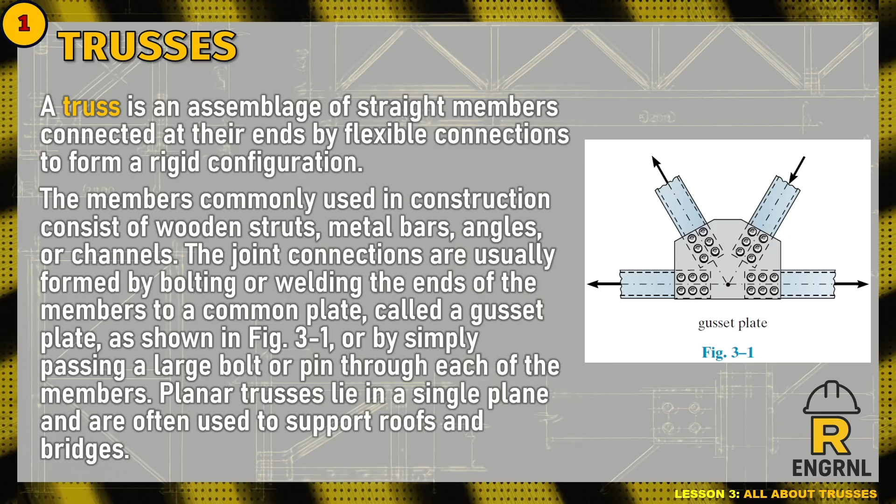But in further discussion, we will also explain if theoretically we can address these connections. So a sample we can see is roof trusses, maybe industrial or sometimes residential.

Trusses used to support roofs are selected on the basis of the span, the slope, and the roof material. Some of the more common types of trusses used are shown in figure 3-3.

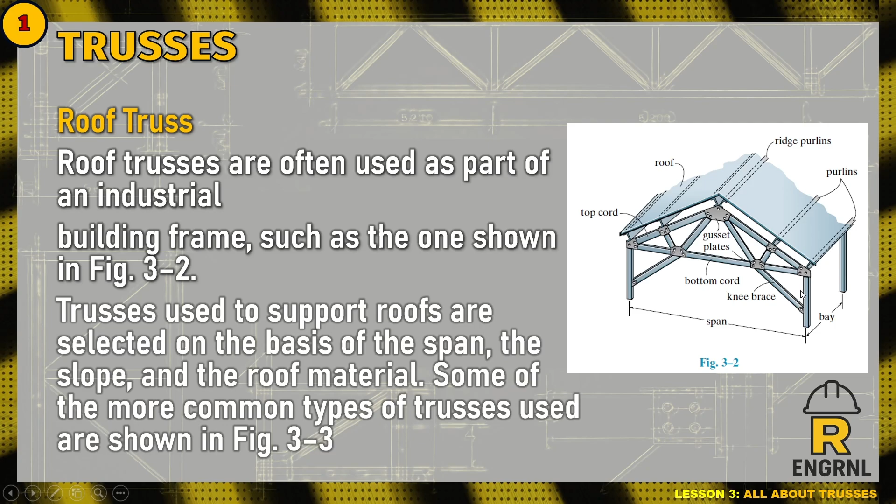But let's first see the common parts of the truss. So it has a top chord, which is the sloping part, literally called top chord because it's at the top. And the bottom chord is what we call the part at the bottom.

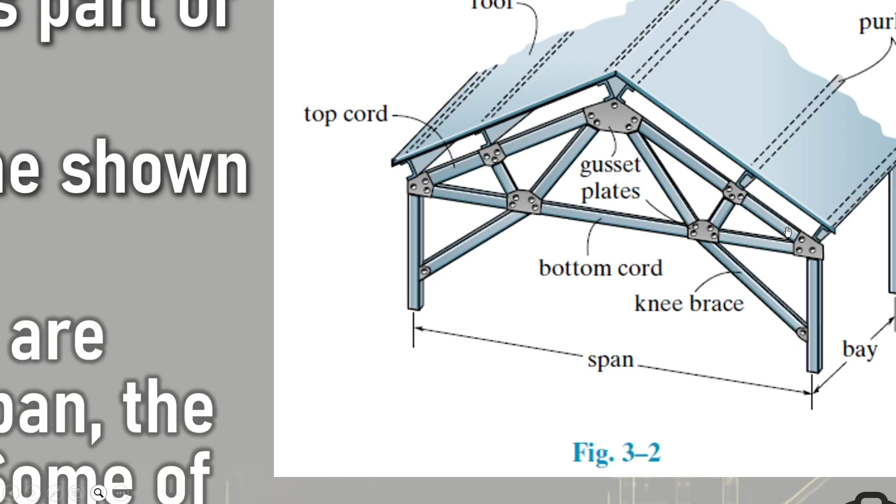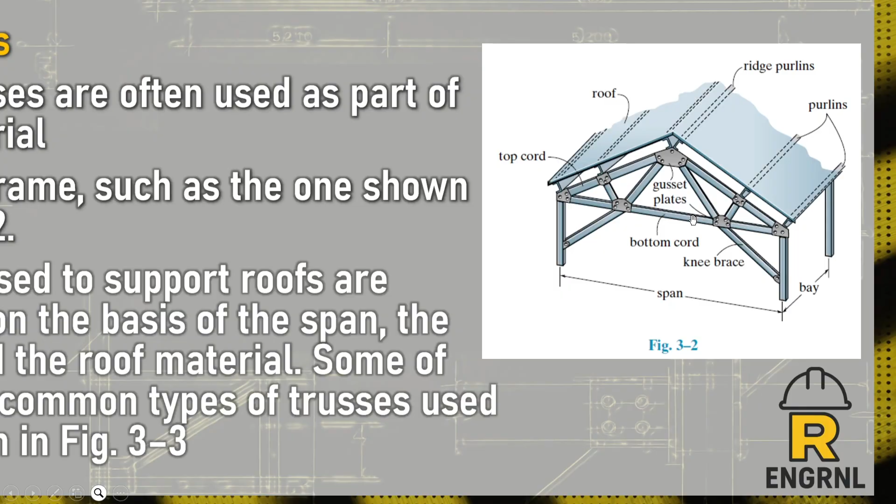We also have web members, usually diagonal and vertical. And if you notice in trusses like this one, this is the Howe truss, which is a common truss. This is what we call the king post.

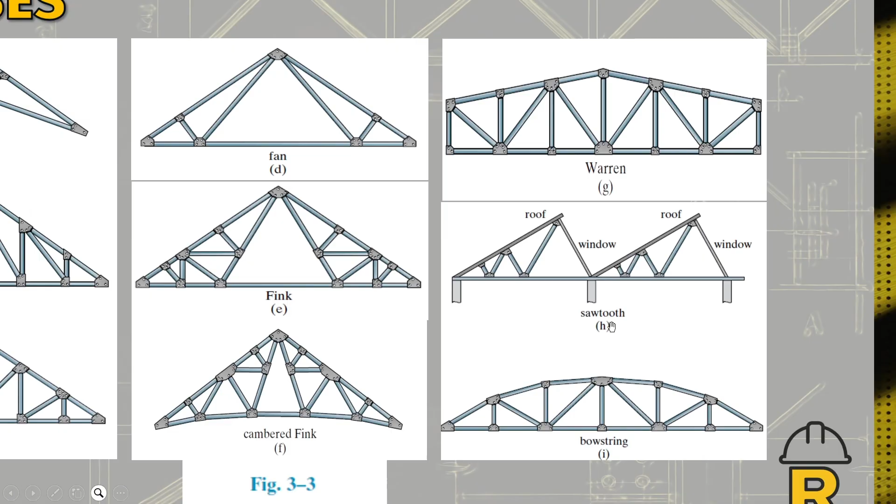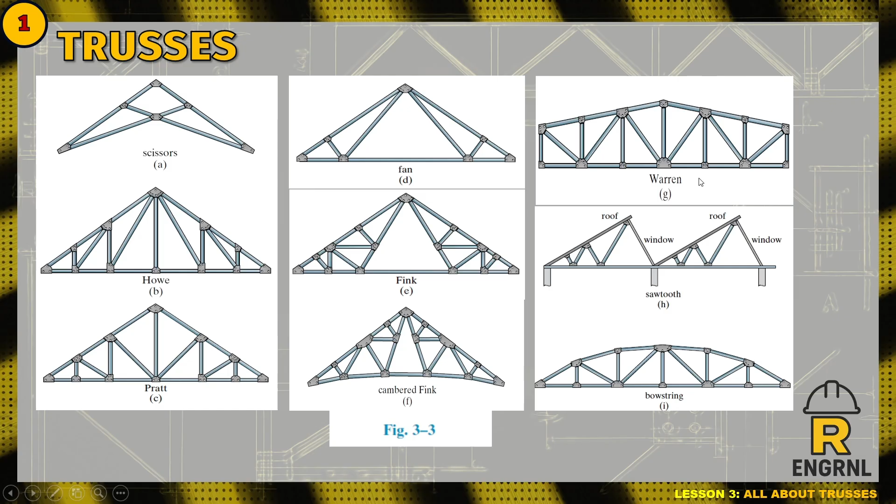The main structural elements of a typical bridge truss are shown in this figure. Here you can see the use of the truss on both sides. It's not just to guide passersby as railing, but it's really the main component to resist loads, whether moving loads, dead loads, or live loads on the bridge.

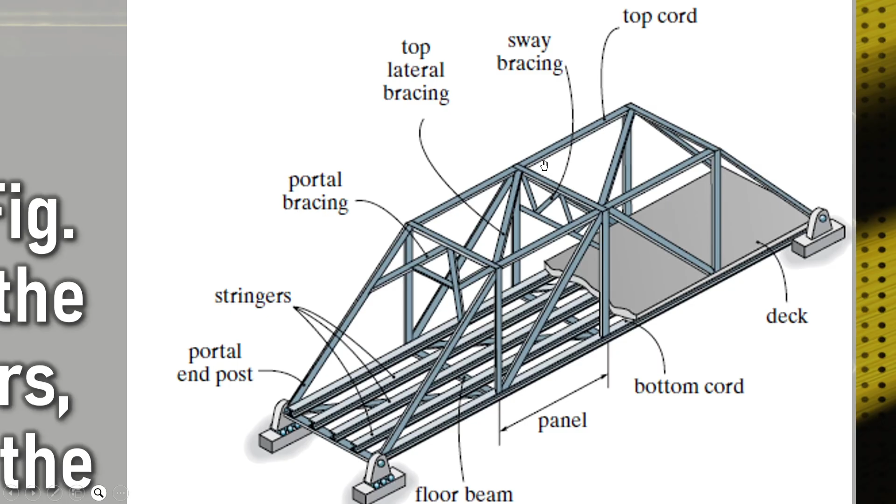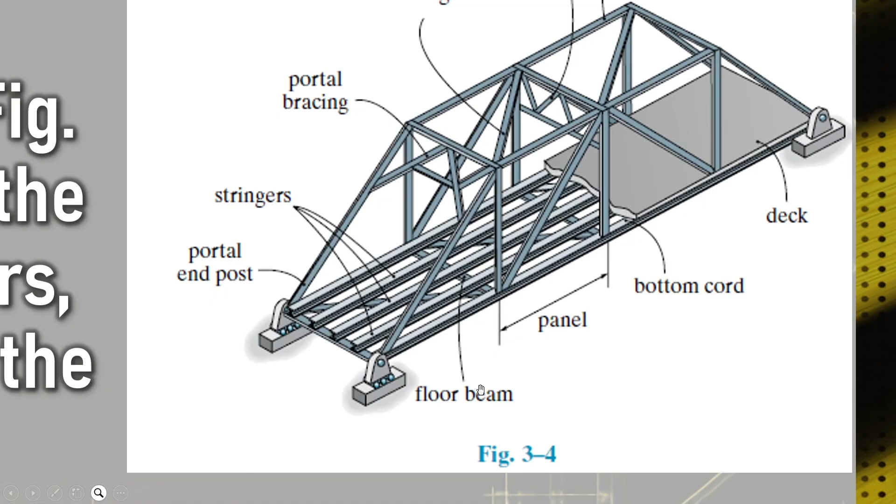So it's supported by different bracings. We have top lateral bracing, and sway bracing to resist lateral loading. We also have portal bracing, stringers, portal end posts, floor beams, and the deck.

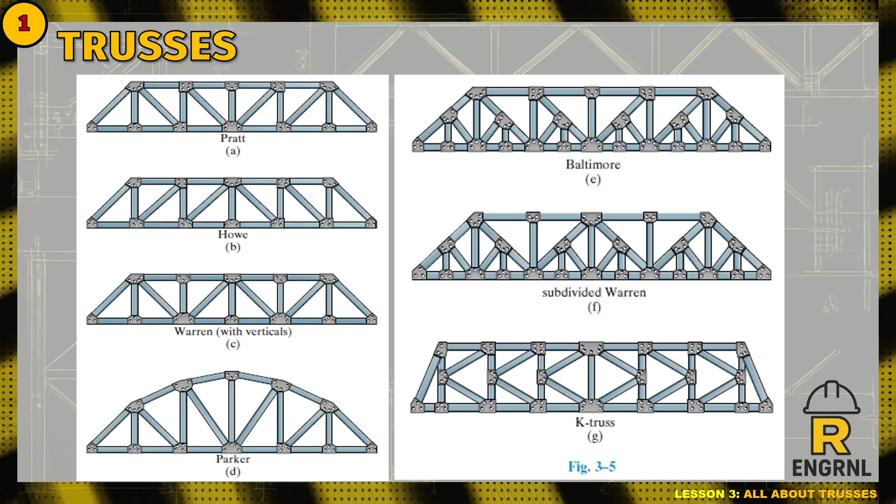So we have assumptions for the design of our trusses. A very good explanation from our reference: to design both the members and the connections of the truss, it is first necessary to determine the force developed in each member when the truss is subjected to a given loading. In this regard, three important assumptions will be made in order to idealize the truss.

This is the idealization of a frame, truss, or beam, which we taught in our last class, so we can better see the nature of the load and its positioning. So, number one, we should assume that all the connections are joined together with smooth pins, even though in actual position it is welded or bolted.

We assume this as a smooth pin, which should be frictionless. It's a ball and socket joint in space trusses, and a frictionless pin in plane trusses. All loadings are applied at the joints. Another important assumption is that we neglect the weights of the members, since the force supported by the members is large in comparison with their weight.

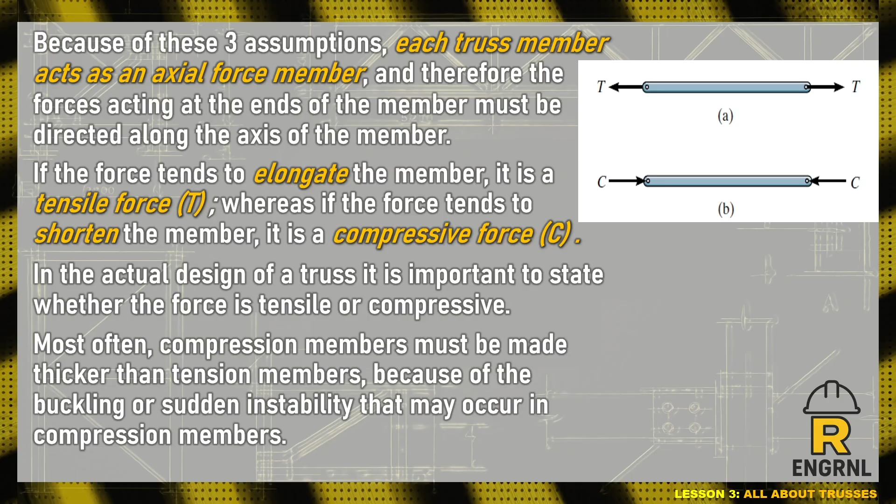We also have an arrangement of members in plane trusses. We can define a plane truss as internally stable if the number and arrangement, take note, not only the number but the geometric arrangement of its members, is such that the truss does not change its shape and remains rigid when detached from the support.

Same as in our first topic on beams and frames or interconnected members, we see stability when it remains rigid even if you remove the support. The term internal is used here to refer to the number and arrangement of members contained within the truss. Instability due to insufficient external support or improper arrangement is for the external support.

So that means we also need to know about internal stability. We have formulas, we also have a guide on how to determine if this is stable or unstable.

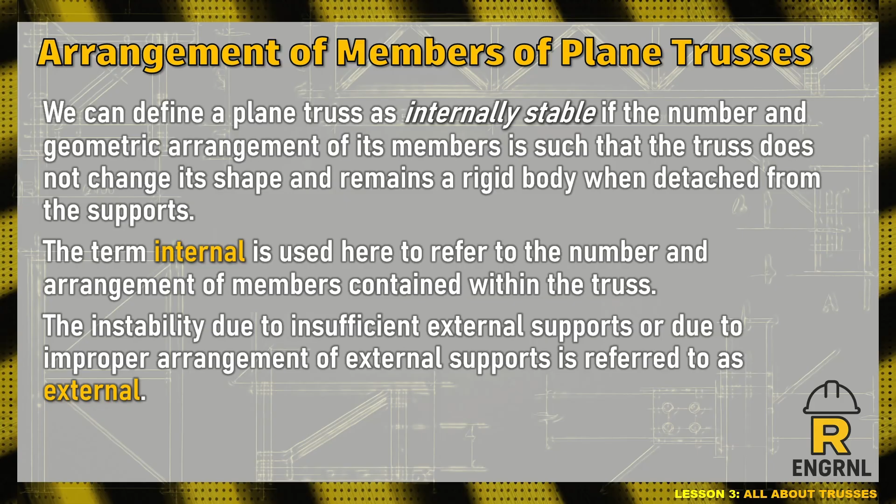There's also an arrangement that causes internal stability, and one of those is the basic arrangement of a simple truss. I'm sure you already know this - of course, a triangle, as shown in letter A.

So the three-member basic simple truss is a strong one that will resist each other when we apply an external load. We've proven that already.

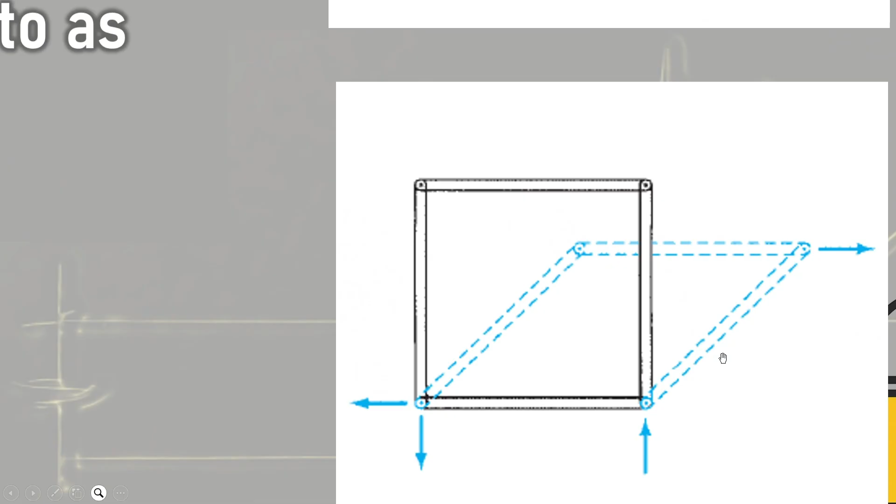So the term internal is used here to refer to the number and arrangement - that's what we were saying earlier.

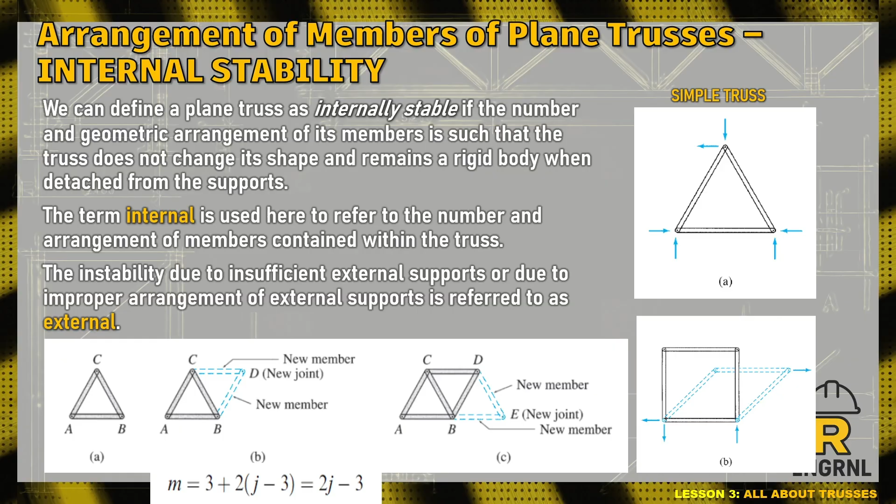We also have a basic counting method - if we keep adding new members to the truss, we can build a series of simple trusses. Take note, this is the type of truss that we can immediately define, meaning it can be covered by our formula to define if it is internally stable or unstable.

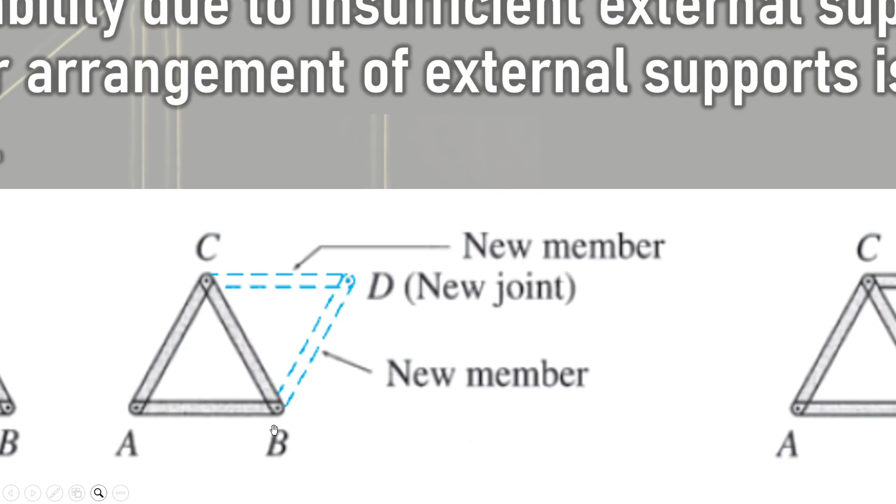So basically, letter A is a simple truss. If we add new members, two new members, that's like adding a new joint as well. That's correct, right? In order to add two new members to three existing ones, there should be one joint connecting them.

So that's the basic idea, which is why we formed our formula - count the members for a simple truss. Remember, simple truss means there are no extra connections, nothing extra. Simple truss means three basic members should be added with two members with one joint. Basically, it is 2j minus 3.

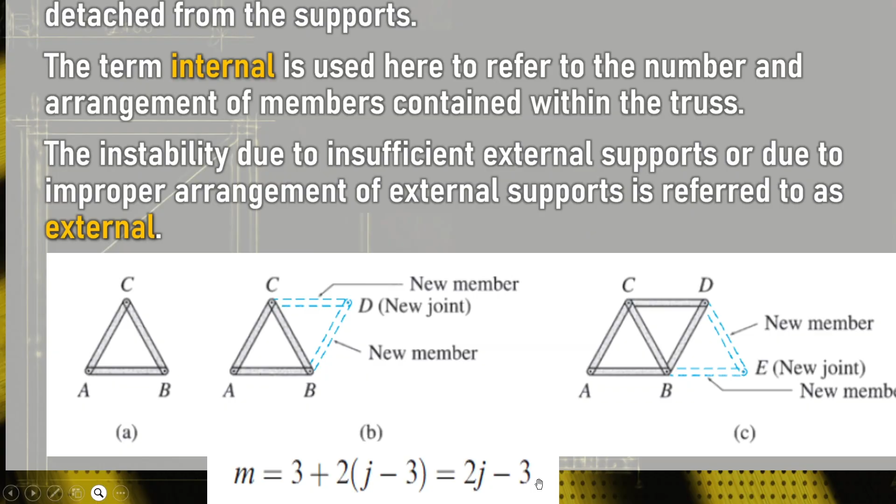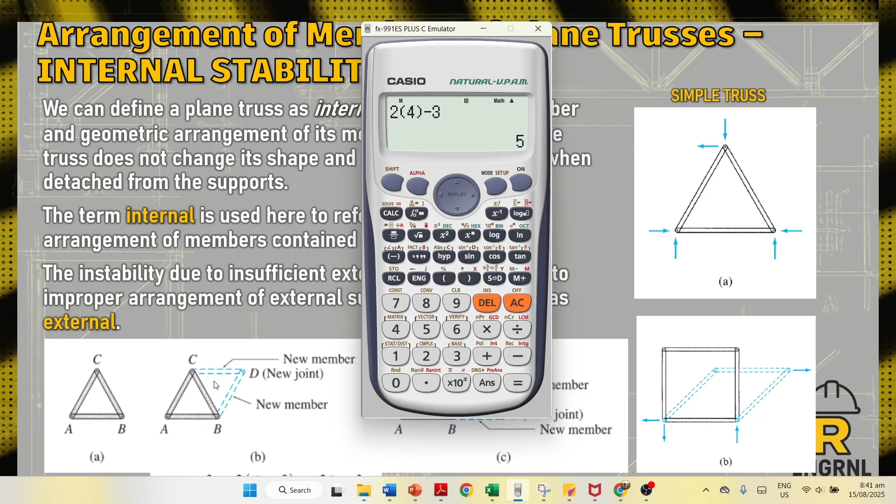This is just to classify it using the formula. So for example, that 5-member truss - how many joints will that be? 4. Because it follows the requirement that in a simple truss there are at least 3 members. So 2j, that's 2 times 4 minus 3, which gives us 5 - so it should have 5 members. And so on.

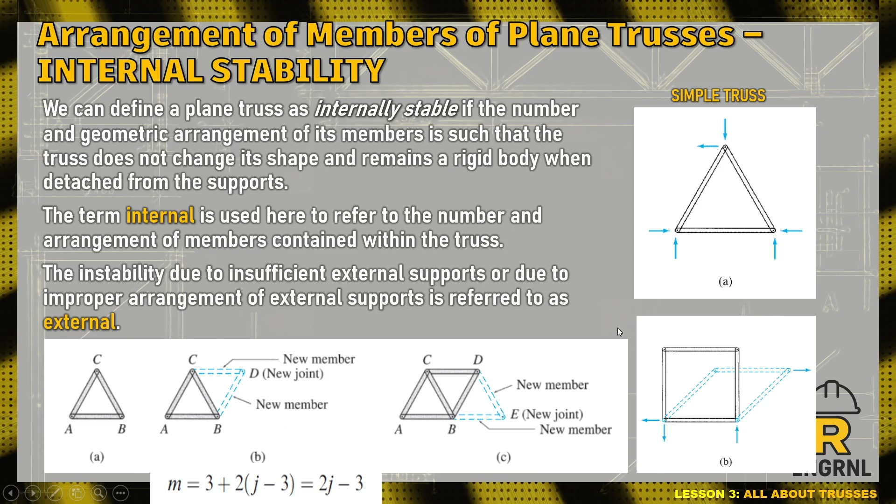So that's a simple truss. Again, tip number 1, technique - you can say it's internally stable when it forms a triangle.